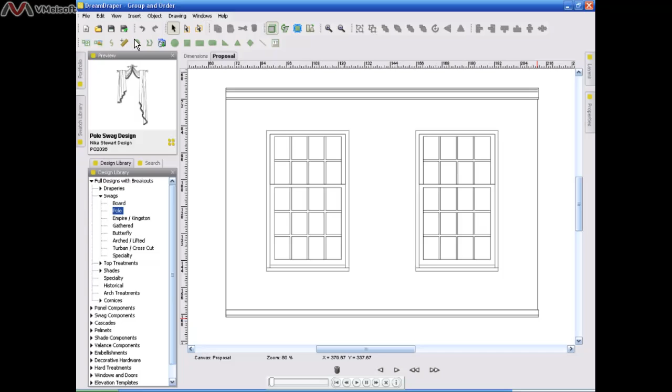One of the things that makes the Dream Draper system so unique is the fact that we have hundreds of full designs that you can totally break apart. We've been working with this design here. This is a full design. It consists of the swags, the cascades, and the hardware. I can quickly put together a treatment to show a customer.

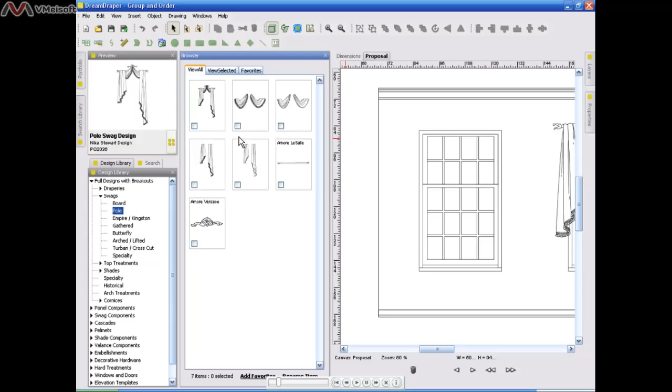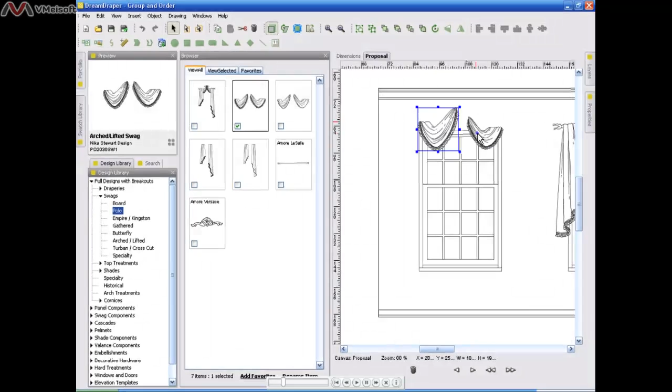Now, if I didn't want to work with the full design and wanted to work with some of the components, remember you can always click on the 4 gold buttons, and you can also drag on the components one at a time. Maybe I start off by bringing on some swags, and I can create a design. But as you can see, it's much faster if you start off with the full design and take off what you don't want.

So that's the beauty of working with the full design: much of the work has been done for you. It gives you points of inspiration and really speeds up the design process.

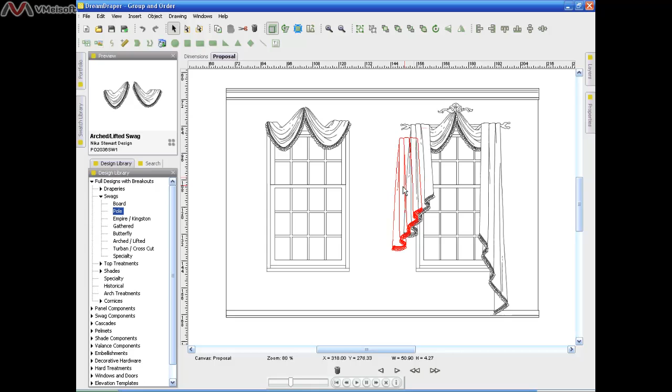Now you can take a full design, such as the one we have here on the right, and ungroup it. That's this icon here. You can ungroup it, and that means you can start taking it apart. If you don't want some of those features on there, you can just take them off. For example, I can take off that cascade. But right now I want it back on, so I'll hit my Edit Undo button up here in my top toolbar. Edit, Undo, and it goes right back to where it was.

Now, one of the things you're going to be doing a lot is ordering your components into a different position. For example, right now on the right side I have the long cascade hanging on the rod, and it's over this swag. But you might want to have that cascade placed under the swag.

So what you can do is highlight that cascade, and I'm going to order that down. To do that, I'll use one of these 4 order icons up here - this is my move down button. So I'm going to click down. Sometimes you have to click multiple times - there, I had to click twice. I clicked on that move down icon twice until the cascade moved behind my swag.

So your group commands up here in your toolbar and your order commands - you're going to be using a lot of these. If I want to now group this treatment on the right, one of the fastest ways is to click on your blank screen and lasso all of the pieces, just like that. I release, and I've grabbed everything.

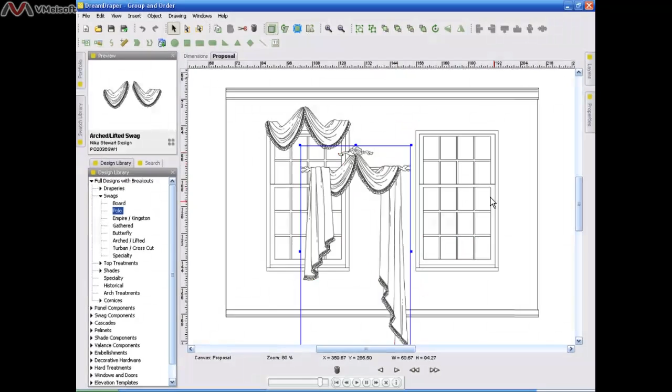Now if I want to group this window treatment, I'll click on my group icon here. There, I grouped my treatment. And if I move this, you can see I was able to move the treatment, and it's grouped, and the window did not come along because I had deselected the window.

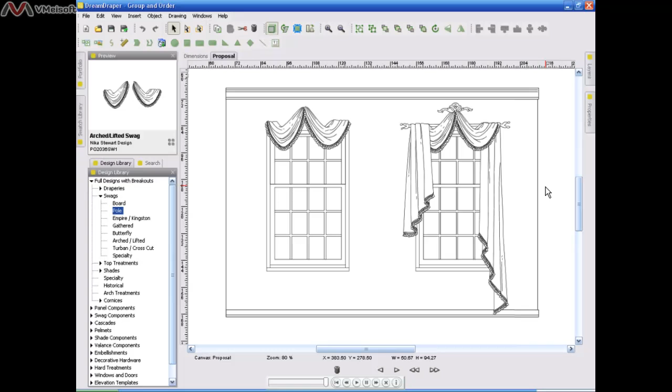I'll go back and hit my Edit Undo button, and the treatment will move right back to where it was. So these are your group and ungroup commands and your order commands, where you can move your treatment to the front, to the back, forwards, and backwards.